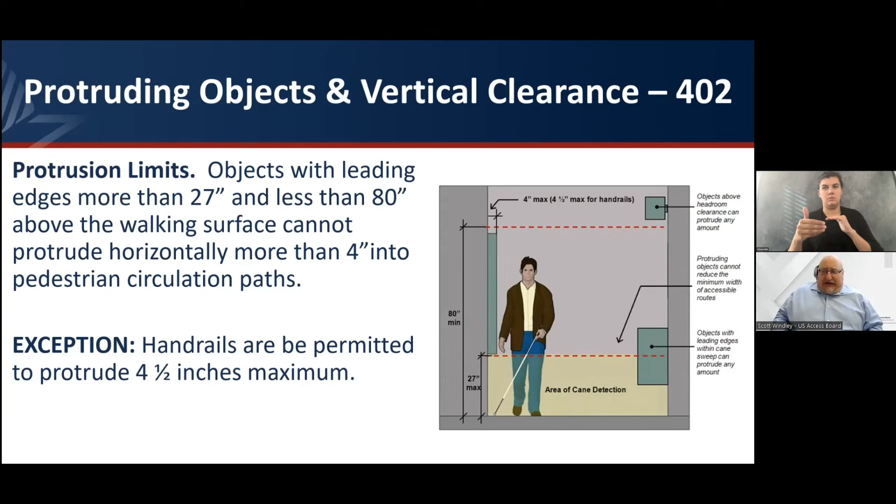When you have a post-mounted object, where objects are mounted on posts or pylons, they must comply with R402.3. And again, the sloping portions of handrails serving stairs and ramps are not required to comply with R402.3.

Where objects are mounted on a single post or pylon, and the objects are more than 27 inches high and less than 80 inches above the walking surface, the objects cannot protrude into the pedestrian circulation path more than 4 inches, measured horizontally from the post or pylon, or more than 4 inches measured horizontally from the outside edge of the base, where the base height is 2.5 inches minimum.

This is a different requirement than is in the building standards. In the building standards, you're currently allowed to protrude much further out from a post or pylon. This change in the public right-of-way guidelines addresses the fact that it's still a protruding object, whether it's mounted on a post or on something else. So the limit is 4 inches, but recognizing that some signs can be larger than 4 inches on either side of a post or pylon.

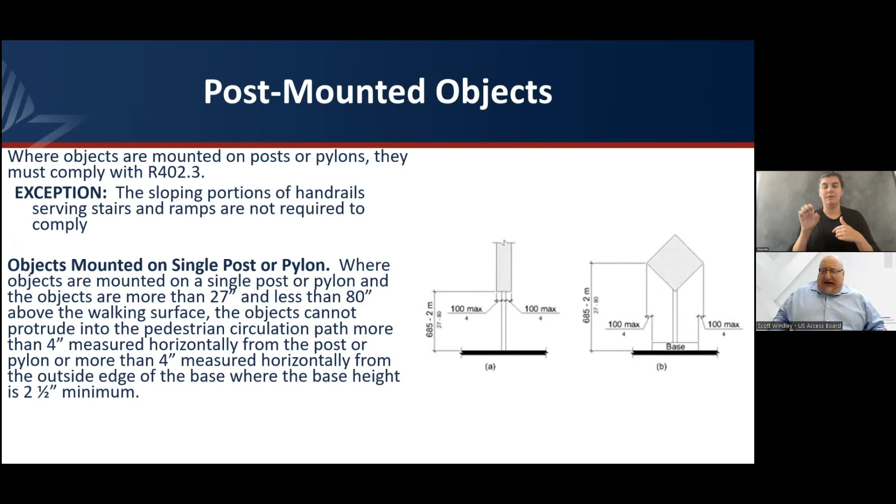What we require in that condition is that you can put a base on the post or pylon, like what is shown in figure B in this slide, and then measure that 4-inch maximum protrusion from the base to the outer edge of the sign, so you can have a larger sign on the post, but it has to have a base if it's going to stick out further than 4 inches from the post.

Now, objects that are mounted between posts or pylons: if the clear distance between the posts or pylons is greater than 12 inches, that means somebody could walk between the poles. Then the lowest edge of the object must be either 27 inches maximum or 80 inches minimum above the walking surface. So it can be above your head and you can walk between those two poles and you're perfectly fine at 80 inches.

But if it's lower than 80 inches, it has to be down at 27, or at least its detectable edge has to be at 27. Objects mounted with the lowest edge greater than 27 inches and less than 80 inches above the walking surface are permitted if a barrier with its lowest edge at 27 inches maximum above the walking surface is provided between the posts or pylons. So you can put a bar or something at the appropriate cane detectable point and still have the sign at somewhere between 27 and 80 inches.

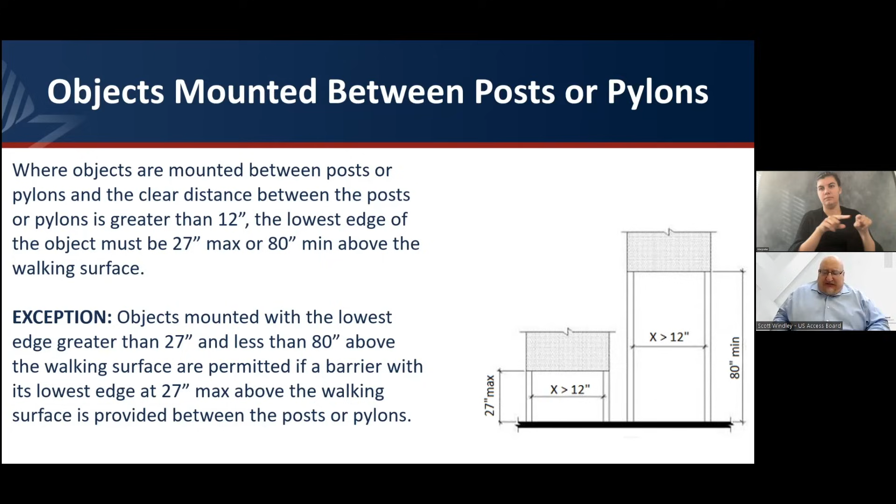Vertical clearance: this is where you're walking under something like an exposed stairway or escalator. The 80-inch minimum height is basically the standard height for a standing person. A lot of times with some of these signs, if you're having to meet MUTCD requirements, that requirement is much higher than 80 inches, so you're actually going to meet these requirements because it's 80 inches high minimum, not a maximum.

So guards or other barriers need to be provided to prohibit pedestrian travel when the vertical clearance for pedestrian travel may get below 80 inches. The lowest edge of the guard or barrier must be located 27 inches maximum above the walking surface. And protruding objects cannot reduce the clear width required for pedestrian access routes.

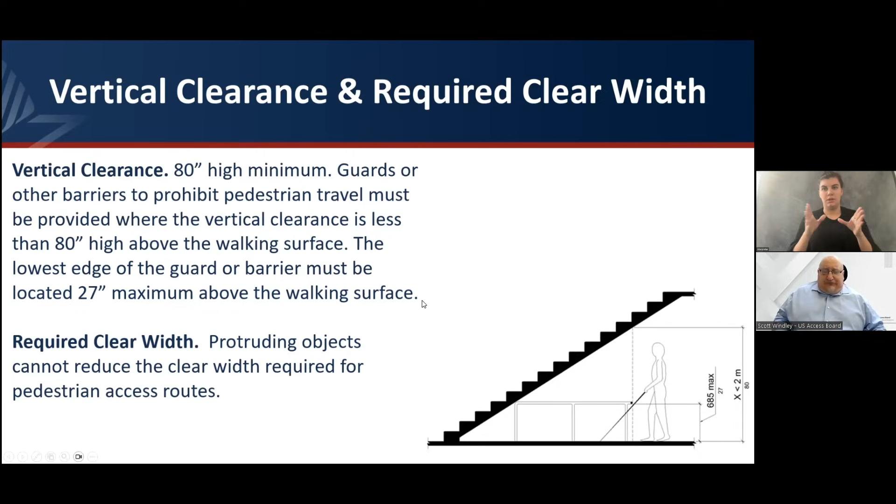Now let's talk about our operable parts in R403. A clear space complying with R404 is required at operable parts. Reach range compliant with R406 for the forward reach and the side reach are talked about in R406.

The operable part has to be operable with one hand and not require tight grasping, pinching, or twisting of the wrist. If you remember when I was talking in the second half of chapter 3's module, you remember me speaking about operable with one hand and not requiring tight pinching or tight grasping or twisting of the wrist.

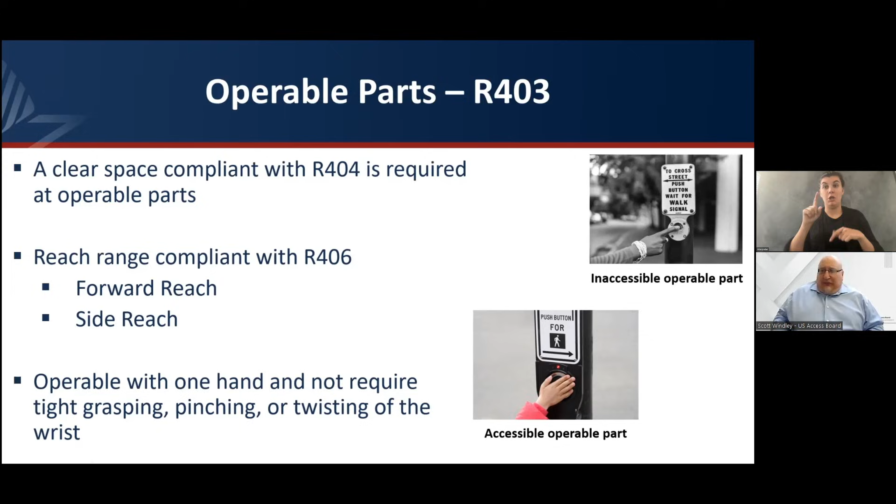A good example of this shown in this slide is the old push buttons that had a little tiny button sometimes placed inside of a hole where you had to stick one finger in there to push the button. Those are considered inaccessible, and they're really not used these days if you've got an up-to-date accessible pedestrian signal. A better accessible option is a push button that's easily pressed with an open hand, or even, if you have a disability where you don't have a hand, you can bump it with your elbow and still activate the signal.

Now, clear space was talked about in the previous slide. The clear space is 30 by 48 inches minimum. This is in R404. The surface has to comply with R302.6, which is stable, firm, and slip resistant. It needs to be positioned for either a forward or a parallel approach, meaning the object you're reaching for is either in front of you or parallel to you. One fully unobstructed side must adjoin a pedestrian access route or adjoin another clear floor space.

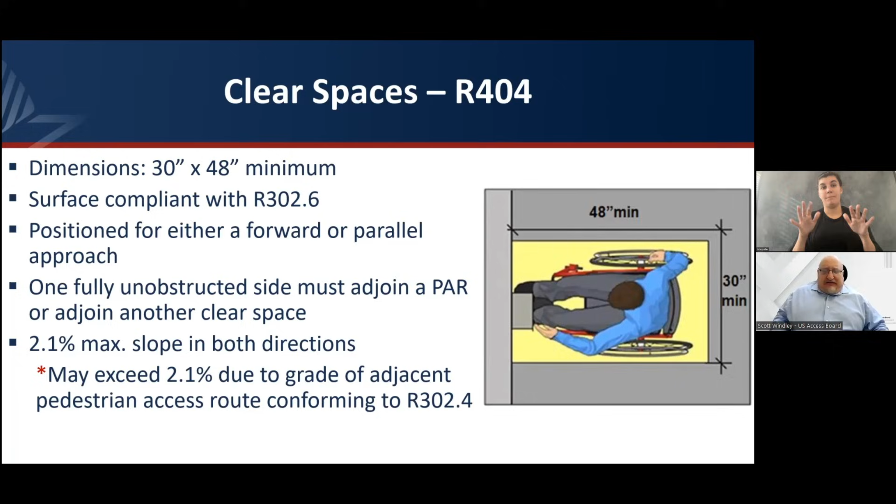It's a 2.1% maximum slope in both directions, but you are allowed to exceed 2.1% slope due to grade of the adjacent pedestrian access route if it complies with R302.4. So we're not asking you to flatten a sidewalk - we've allowed you to follow the roadway. We're just wanting you to be aware that the optimum is 2.1% in both directions, but there are allowances and exceptions that allow you, when on a sidewalk that already complies with R302.4, to put a clear space on that sidewalk and not have to flatten it.

Where a clear space is confined on all or part of three sides - in other words, in an alcove, either created by construction or created just by where it's located - additional maneuvering space is required complying with either R404.7.1 forward approach or R404.7.2 parallel approach. Basically it's based on a forward approach.

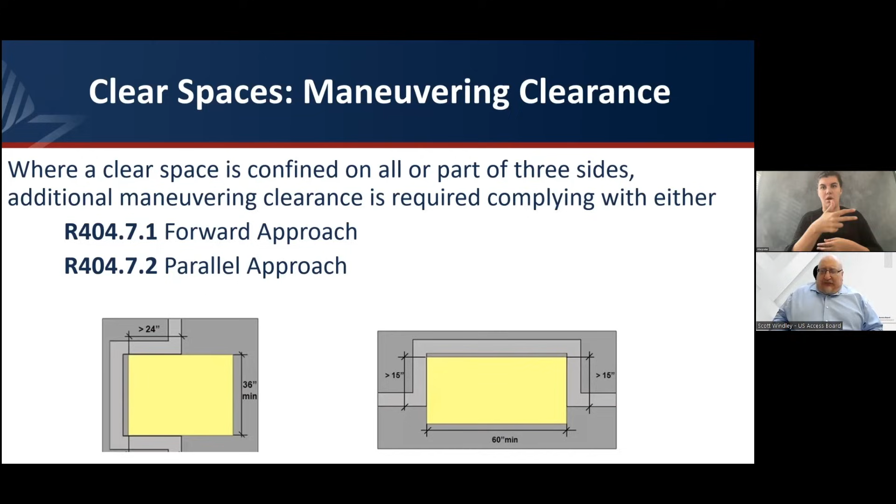If the depth of the alcove is greater than 24 inches, you need to provide 36 inches of width instead of the 30-inch width. And for a parallel approach, if it's deeper than 15 inches, then instead of only 48 inches in length, it has to be 60 inches in length to allow for maneuvering in a parallel parking orientation for the mobility device to reach the object you're trying to reach.

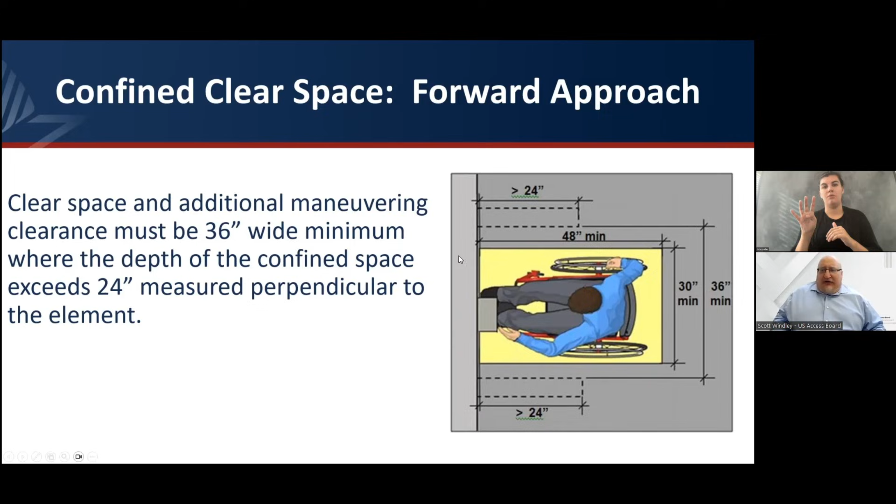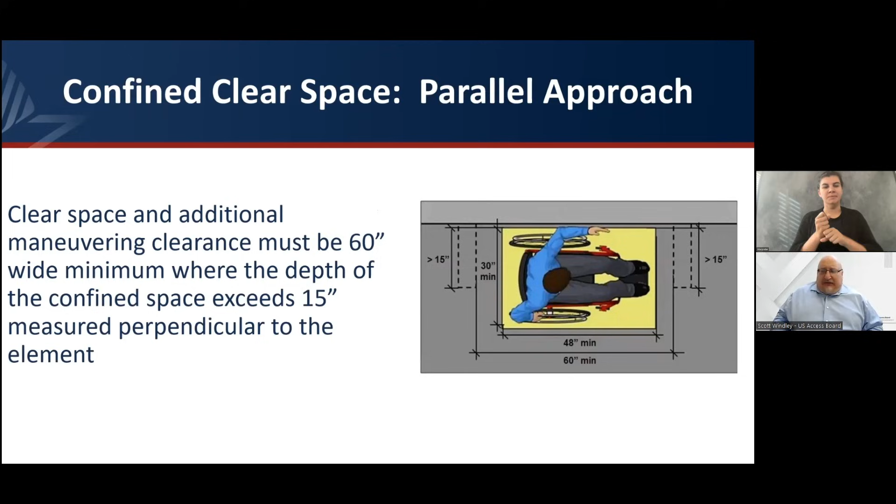Now, for a forward approach, the clear space and additional maneuvering clearance must be 36 inches wide minimum where the depth of the confined space exceeds 24 inches - basically half of the 48. The same thing happens with confined clear floor space on a parallel approach: if it's more than half of the 30 inches, you provide the additional foot, making it instead of 48 inches, 60 inches in length.

Toe clearance: it is possible to have toe clearance under section R405 that does not include knee clearance, but you never have knee clearance without toe clearance - I just want to say that. Toe clearance is the space under an element between the ground surface and 9 inches above the ground surface. The maximum depth of knee and toe space is 25 inches, but the maximum depth counted for toe clearance is only 6 inches.

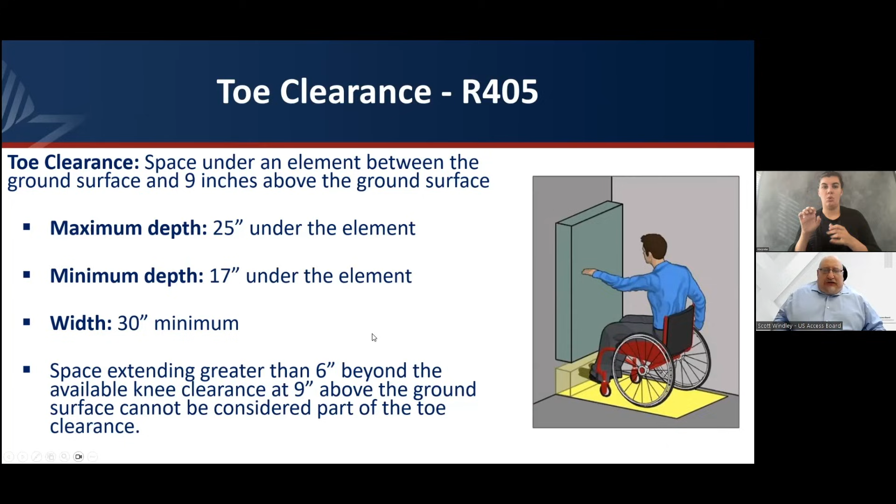This is showing you the overall dimensions of both knee and toe, and I'll explain that in the next slide. So here you have knee clearance that also includes toe clearance, because obviously when you're sitting in a wheelchair or even in a regular chair, your toes come before your knees do.

So knee clearance is the space under an element between 9 inches and 27 inches above the ground surface. The maximum depth is 25 inches under the element at 9 inches above the ground surface, with a minimum depth of 11 inches at 9 inches above the ground surface, and 8 inches of that 25 inches is at 27 inches above the ground surface. I will show you some additional drawings in the next couple of slides that will help explain this.

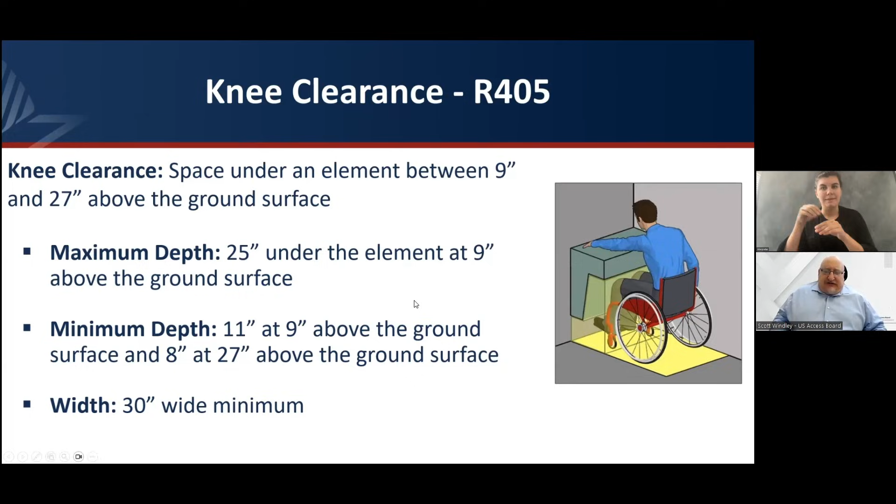And the width is 30 inches wide minimum, of course, unless it's in an alcove, and then it becomes 36 inches, which we talked about a couple of slides ago.

For the clearance reduction, basically your toe space is 9 inches high and 6 inches maximum. Then for a portion of the 11 inches of knee space, you can taper that at a 6-to-1 slope for 3 inches, which gets you up to 27 inches. The last 8 inches, making 17 total between the 8, 3, and 6, is at 27 inches high. If you need additional space beyond the 17 inches, you add that to the knee space, not the toe space.

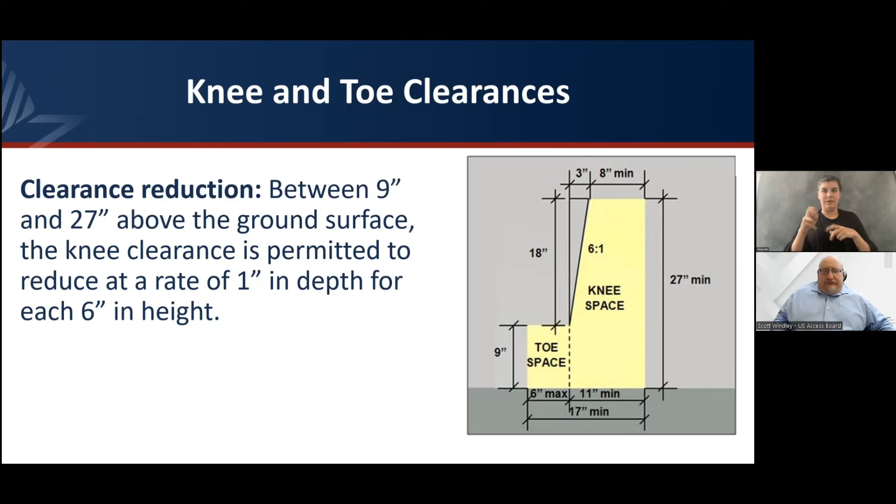When you're reaching forward, reach range forward approach, high reach is 48 inches maximum above the ground, and the low reach is 15 inches above the ground. Remember, when doing a forward approach, it's typically not possible for most wheelchair users to reach beyond their toes. So you can't expect them to reach beyond as far as their toes are allowed to go forward. That line where your toes hit the wall is basically your reach range limit as far as the horizontal amount you can reach forward.

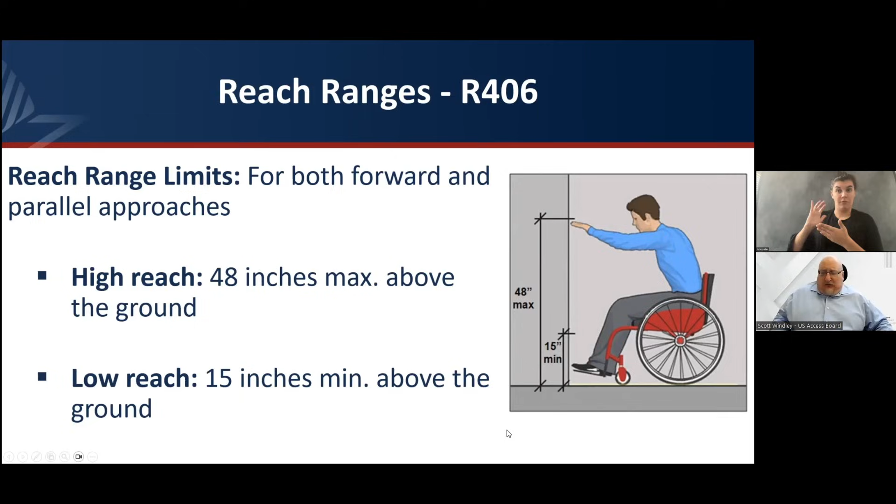And then the height: if it's unobstructed, like this one is, the maximum height reach is 48 inches. It is lower if obstructed. We don't allow an obstructed reach in the public right-of-way guidelines. That was proposed in the proposed rule and continues in the final rule, that we do not allow an obstruction other than the maximum of 10 inches, which I'm showing you here with the side reach.

There's no obstruction allowed on a forward reach, but on a side reach, we allow a 10-inch maximum obstruction on the parallel or side reach, using parallel and side synonymously here. The depth of the obstruction is 10 inches max, and the height of the obstruction is 34 inches maximum.

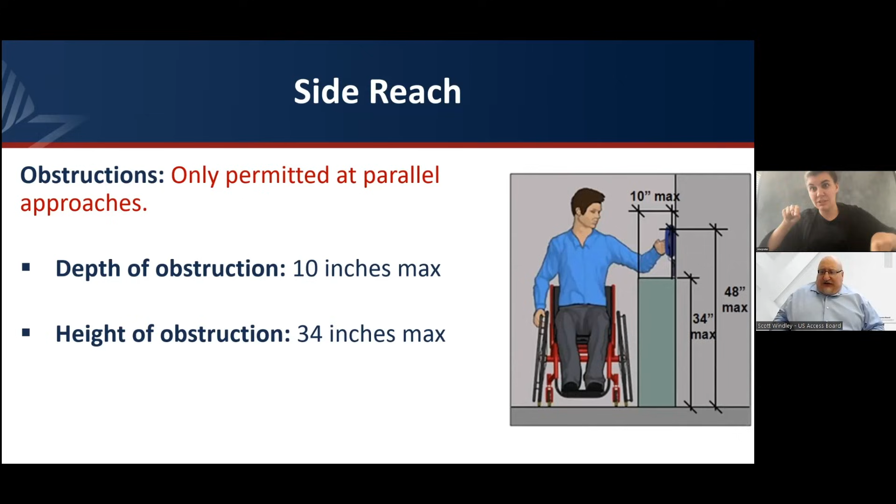This becomes really important with push buttons, because accessible pedestrian signals, or any pedestrian signal that requires you to push a button, can't be placed away from the prepared surface more than 10 inches, because you can't reach further than 10 inches to your side to push the button. Keep that in mind.

So let's go into ramps, R407. Now, these ramp requirements do not apply to curb ramps or pedestrian access routes following the grade established for the adjacent street, consistent with the requirements of 302.4.1. This type of ramp may be on the right of way, but it's usually a ramp leading from the sidewalk level to a building entrance, or to something else like a pedestrian overpass or underpass. Those requirements basically follow exactly the same requirement as building standards, except for a couple little differences.

The maximum running slope of a ramp is 1 in 12. If it's steeper than 1 in 12, it's not acceptable. That's 8.3% for the percent option. Cross slope is the usual 2.1%, or 1 to 48.

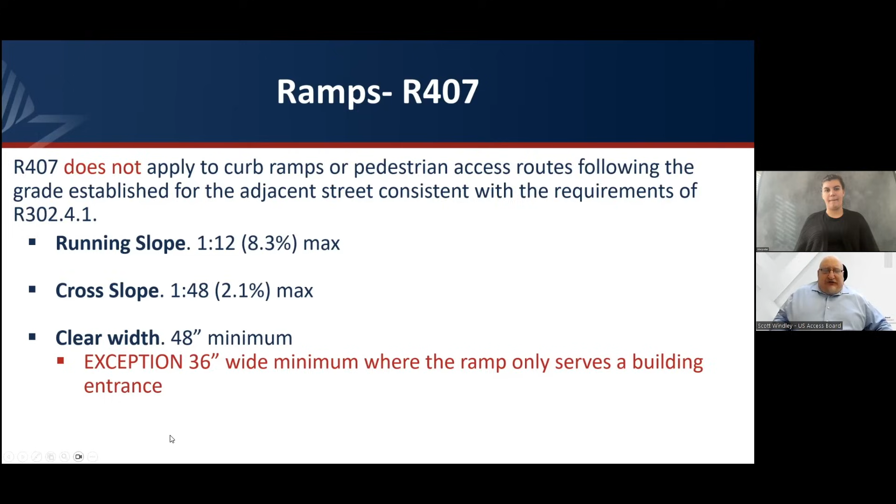The clear width is a little different. In the building guidelines, we only require 36 inches wide, but in the public right-of-way requirements, it's going to be 48 inches minimum in width, unless the ramp only serves a building entrance. If all it's doing is taking you up to a building entrance, and that's the only thing that ramp is doing, then it's permitted to only be 36 inches wide, not required to be 48 inches wide. So there is an exception for the 48-inch width requirement.

Now, the maximum rise for a ramp is 30 inches. For one ramp run, you can only raise 30 inches in height.

A landing is required at the top and the bottom of each run. The landing slope is 2.1% parallel and perpendicular to the ramp running slope, so both the cross slope and the running slope are 2.1% maximum. The landing clear width is at least as wide as the widest ramp run leading to the landing, and the length of that landing is 60 inches minimum.

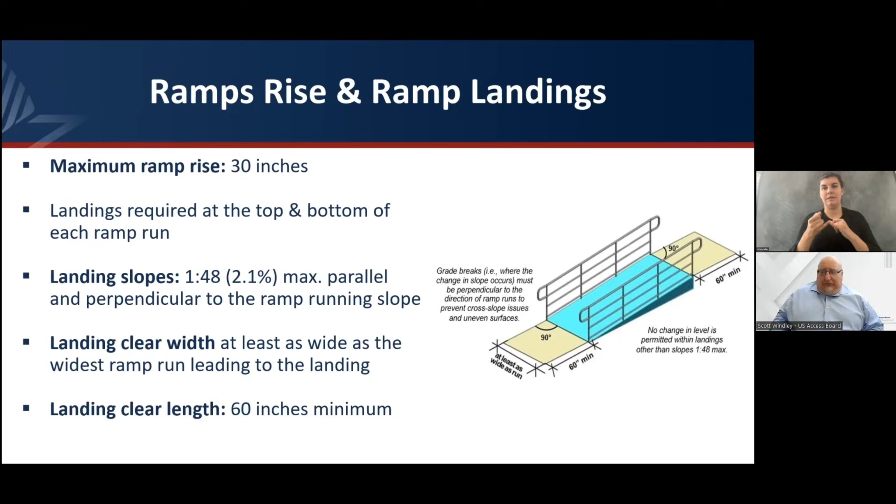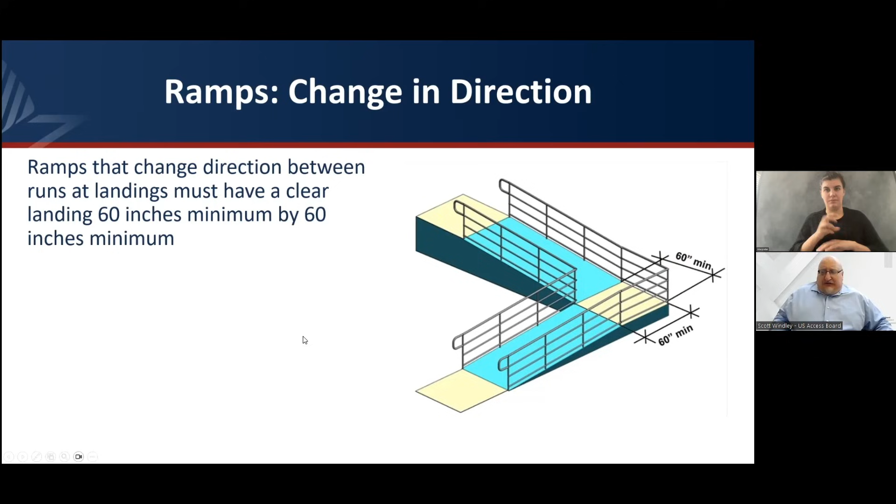If you do a change in direction at ramp runs, where you may have a 90-degree turn, a 180-degree turn, or a dogleg turn as it's sometimes called, ramps that change direction between runs at landings must have a clear landing 60 inches by 60 inches. No matter what the width of the ramp is, the landing is 60 by 60 if you're having to turn on that landing. This applies to any change in direction, not just a 90 or a 180. If it's anywhere between 0 and 180 degrees, it's a change in direction and requires the 60 by 60 landing.

Handrails are required on both sides of ramp runs when the rise of the ramp is higher than 6 inches. I'll repeat what I said earlier because I cannot stress this enough: these requirements in R407 do not apply to a curb ramp. So this is a ramp, and if it rises more than 6 inches, it's required to have handrails on both sides.

You have to have 12-inch extensions at both the bottom and the top of the handrail, and it cannot be obstructed more than 20% of the length for the gripping surface, along with all the other requirements specified in 407, including that it can't be a protruding object. This addresses the bottom edge of your extension, usually called a P extension because it makes the shape of a P. The bottom edge of that should be at or below 27 inches so it doesn't become a protruding object.

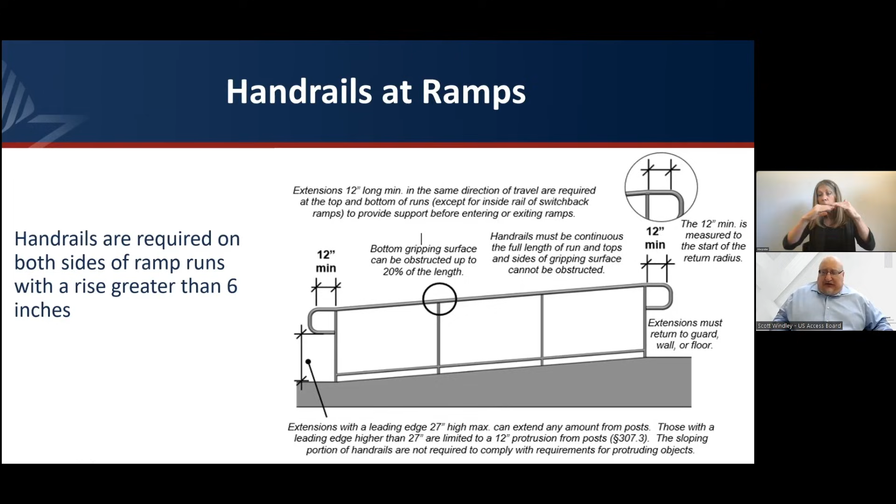Now, edge protection must be provided on each side of the ramp run and each side of ramp landings, except those serving an adjoining ramp run or a stairway or other pedestrian circulation path. We don't want a curb before a set of stairs because that's essentially a tripping hazard. The landing may serve both the ramp and stairs that may be going at a 90-degree angle from the ramp, and we wouldn't require edge protection on the part that leads to the steps or the stairway.

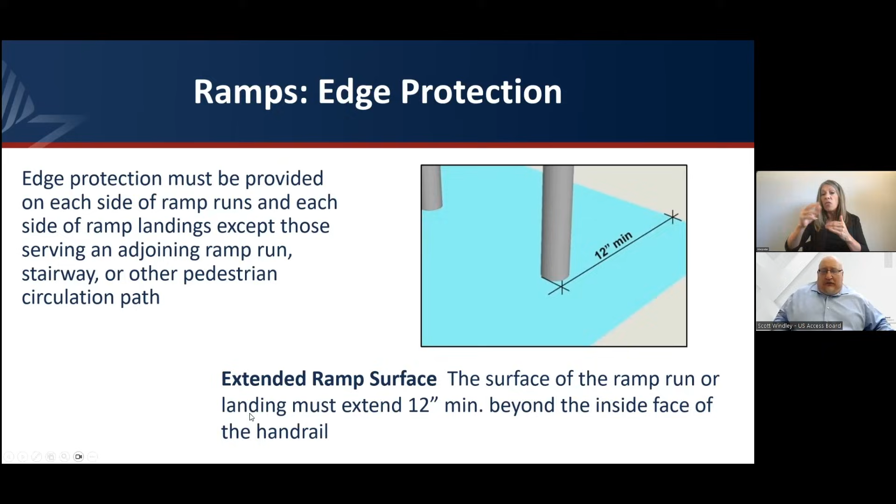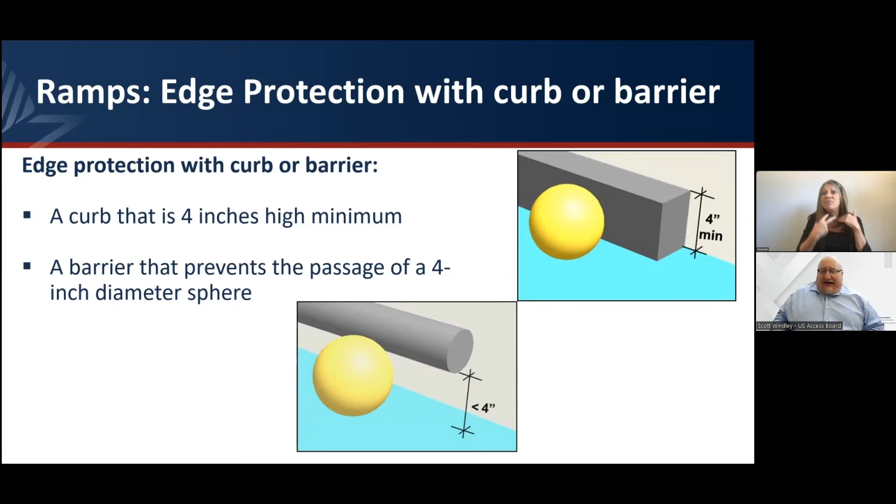There are several different options for edge protection. You have the extended ramp surface, shown here, where you extend the ramp surface 12 inches beyond the railings. Or, as shown in the next images of edge protection, you could do a curb 4 inches high, or a barrier like a lower rail on your handrail that is low enough that it doesn't permit a 4-inch sphere to pass through the space between the bottom of the ramp and the railing. That requirement is a life safety requirement more than anything else, so that children don't get their heads stuck between the railing and the ramp surface.

Now let's talk about stairs. Stairs are generally not very accessible, but they do have requirements, and this applies if the stair is in the pedestrian access route. All steps on a flight of stairs must have uniform riser height and uniform tread depth. This is consistent with building guidelines requiring the same riser height throughout your stairway.

This riser height is 4 inches high minimum, 7 inches high maximum. But what you do is pick a dimension—if you want your risers to be 5 inches high, all of your risers have to be 5 inches high. You can't have one that's 4, one that's 6, and one that's 7. Minimum tread depth is 11 inches.

Open risers are not permitted if it's a stair in the right of way, and the stairs must have handrails complying with R409.

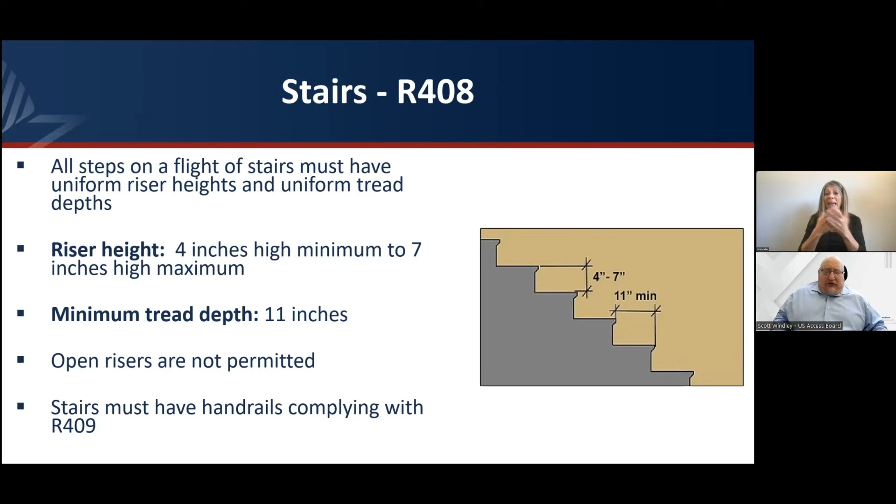Your stair nosing—and this is one of the reasons open risers are not permitted—is important because some people with disabilities are semi-ambulatory and may drag their foot up the step. That's why open risers are not permitted, because you can get your foot caught in that condition if you don't have the ability to keep your foot from moving forward and under that riser. So that's why we require no open risers. But the nosing is important as well, because we don't want to trap a person's toes as they're dragging it up the edge of the stair.

So you either do a 1/2 inch maximum radius with a straight riser, or an angled riser of 30 degrees maximum if you're doing an angled riser, or if you do a curved or beveled nosing, it's 1.5 inches maximum and beveled so that it doesn't trap a person's toes under it.

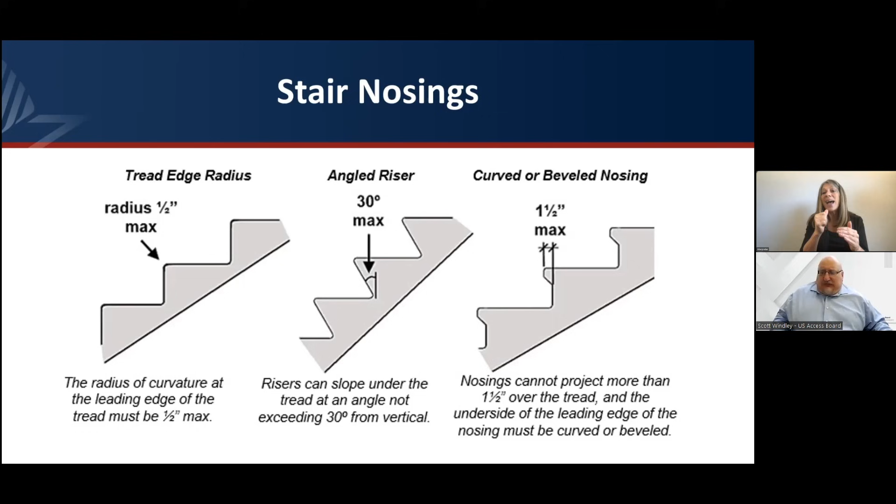We require a visual contrast at the leading edge of each step, tread, and the top of the landing. So it must be marked with a visual contrasting stripe. That can be done in yellow, but it doesn't have to be yellow. It just needs to contrast with its surrounding surface, dark on light or light on dark. And it's a 1 inch minimum wide strip.

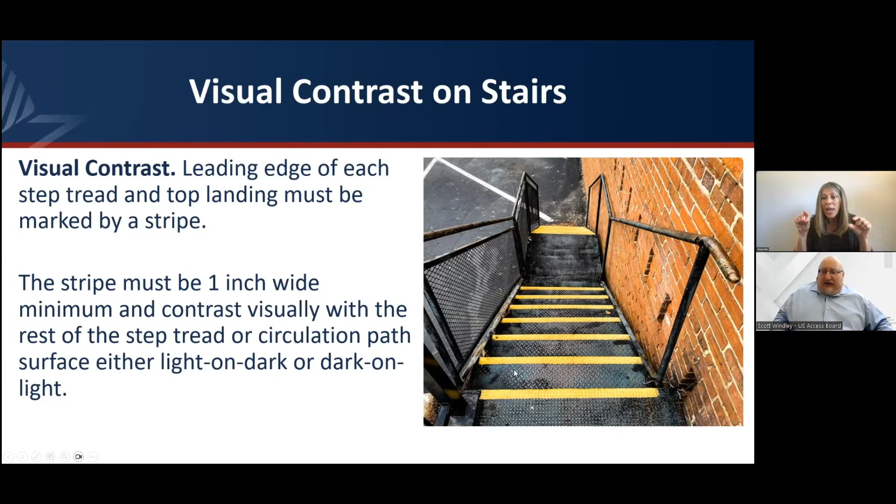Handrails. Let's talk about handrails. Handrails that are required at ramps and stairs, and handrails provided on pedestrian circulation paths, must comply with 409. Remember, our 409, like 407, does not apply to curb ramps. If you haven't figured it out by now, we don't want curb ramps to have handrails.

This is really important to understand. Handrails that are required at ramps and stairs, and handrails provided on the pedestrian circulation path - we don't require them on the pedestrian circulation path, but if you provide any kind of handrail on a circulation path in the right of way, it's going to need to meet the requirements of 409. Now I'm talking about handrails and not guardrails. I want to make sure that's clear as well.

Handrails must be provided on both sides of ramps and stairs, must be continuous within the full length of each ramp run or stair flight. The inside handrail on switchbacks or dogleg ramps must be continuous between the ramp runs or stair flights. And handrails cannot rotate within their fittings. Where expansion joints are necessary for large spans of handrails, the expansion joint is permitted to rotate in its fitting, but only the expansion joint, not the whole railing.

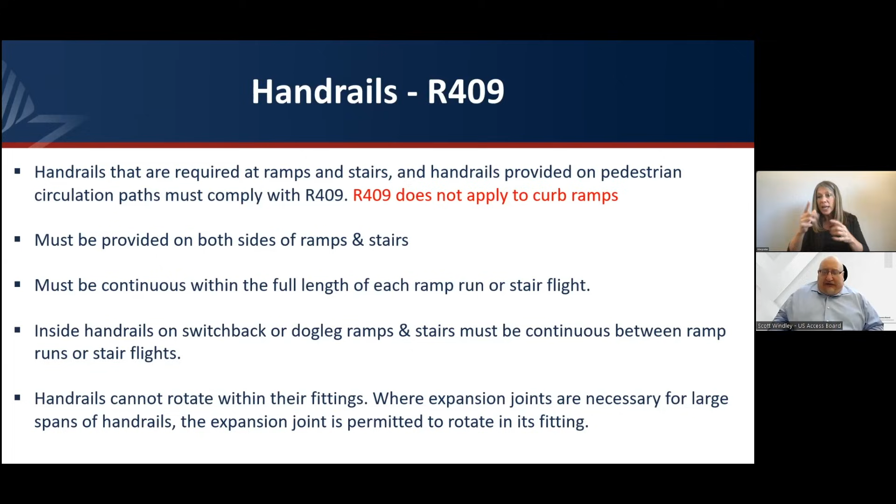Handrail height and gripping surface. The top of the gripping surface of handrails must be between 34 inches and 38 inches maximum, measured vertically above the walking surface, ramp surfaces, and stair nosings. Handrails must be at a consistent height above the walking surface, ramp surface, and stair nosing. So what that means is that you can't have a stair or ramp handrail that changes heights along the way. It needs to stay a consistent height above those surfaces.

Handrail gripping surfaces and any surfaces adjacent to them must be free of sharp or abrasive elements and have rounded edges. The reason for that is because usually the people using these types of handrails are maybe people who are semi-ambulatory but need support to help them get up and down the stair or ramp, and so they're leaning pretty heavily on these handrails. They're also sometimes keeping their hand on the handrail all the way down and sliding along it, so we don't want that surface to be rough or abrasive.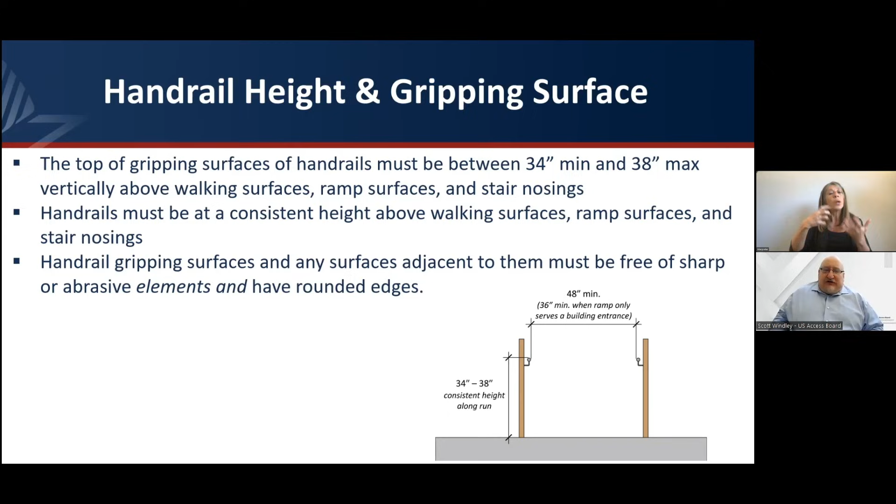Handrail gripping surfaces must extend beyond and in the same direction of ramp runs and stair flights. The handrail extensions cannot extend into the roadway or pedestrian circulation path. So in new construction, you design it in such a way that that doesn't happen - the stairs or the ramp ends before you're entering the circulation path or the roadway.

In alterations, if a handrail extension would reduce the clear width of a pedestrian access route, they must extend as far as possible without reducing the width of the pedestrian access route. That's in alteration conditions because you may not be able to change the situation. But in new construction, when it's all on paper, there shouldn't be an excuse not to provide that extension. So that exception is specifically for alterations.

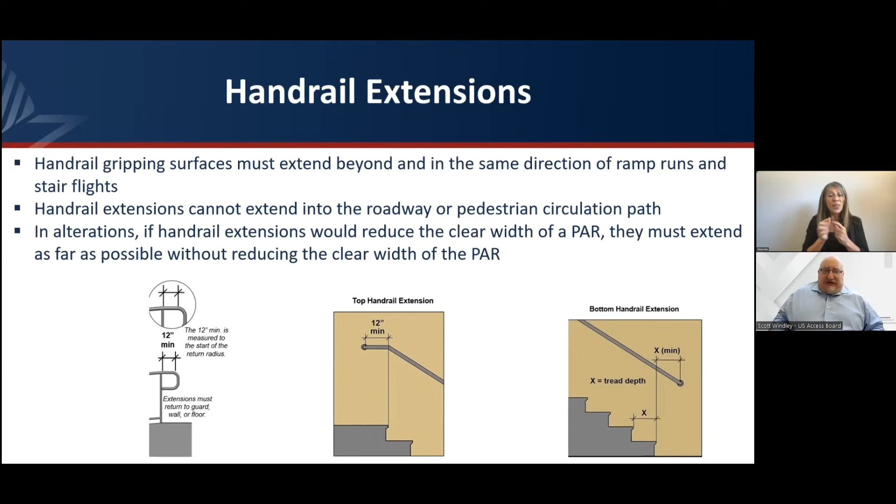Clearance around handrails - this is so you can grip it properly. There's a minimum 1 1/2 inch clearance requirement between the handrail gripping surface and adjacent surfaces. The handrail gripping surface must be continuous along its length and cannot be obstructed along the tops or sides. The bottoms of handrail gripping surfaces cannot be obstructed for more than 20% of their length. So we do recognize they have to have mounting points, but they don't need so many that essentially the whole rail is not available for gripping.

Now, where provided, horizontal projections can occur 1.5 inches minimum below the bottom of the handrail gripping surface. And that's shown to you here - whatever you've got your handrail attached to, you're going to need to occasionally do a horizontal connection, and those connections can happen as long as they're 1.5 inches minimum below the bottom of the handrail gripping surface.

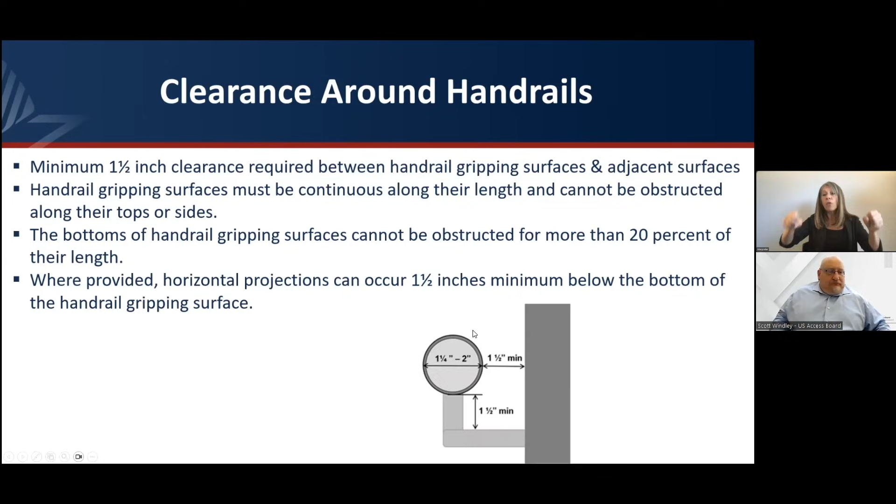Circular cross sections for handrails are fairly simple. Handrail gripping surfaces with a circular cross section must have an outside diameter of 1.25 inches minimum and 2 inches maximum. Non-circular cross sections get a little more complicated, but we do allow them.

A handrail gripping surface with a non-circular cross section must have a perimeter dimension of 4 inches minimum and 6.25 inches maximum, and a cross section dimension of 2.25 inches maximum.

Where expansion joints are necessary for large spans of handrails, the expansion joint cross-section is permitted to be smaller than the specified cross-section diameter for 1 inch maximum in length. We recognize you may have to put an expansion joint in, usually done with a smaller diameter rail, so we do permit that for long expansions.

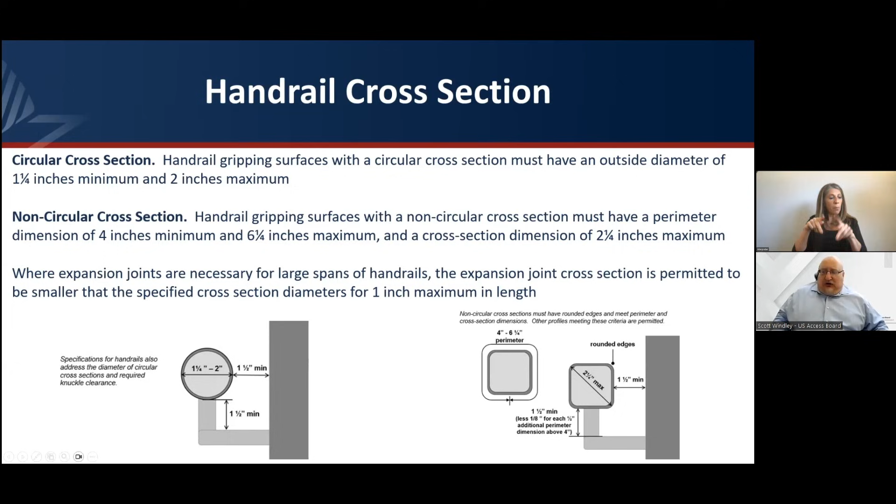Now let's talk about R410 and the visual characters on signs. Notice we don't talk about Braille in chapter 4, because signs in the public right-of-way are not in a consistent location like they are in a building, and we can't say put the sign on the strike side of the door since there's not a whole lot of doors in the public right-of-way. So finish and contrast, we deal with the visual characters on the signs in 410.

The finish and contrast: characters and their backgrounds must have a non-glare finish and contrast with their background, with either a light character on a dark background or a dark character on a light background.

Case: the characters can be uppercase, lowercase, or a combination of both. The style must be conventional in form. They cannot be italics, oblique, script, or highly decorative or other unusual forms.

Character proportions must be selected from fonts where the width of the uppercase letter O is 55% minimum and 110% maximum of the height of the uppercase letter I. This may sound a little difficult, but most sign manufacturing companies will understand all this.

Stroke thickness of the uppercase letter I must be 10% minimum and 30% maximum of the height of the character. That's the stroke thickness.

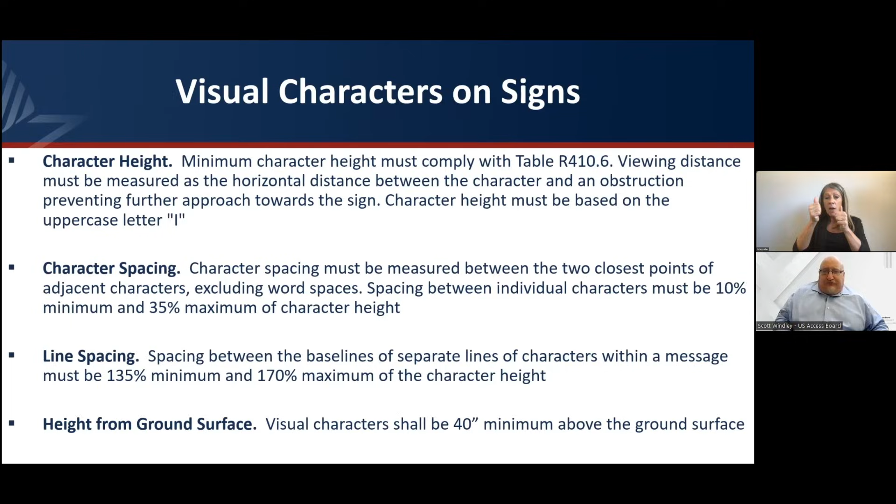And last but not least, in chapter 4 we have the International Symbol of Accessibility. Everyone should be fairly familiar with the symbol, and the symbol and its background must have a non-glare finish, and it must contrast with its background with either a light symbol on a dark background or a dark symbol on a light background.